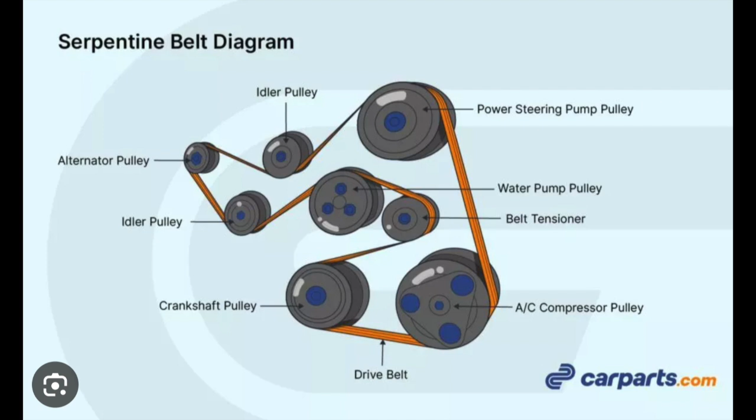I'm giving you this example to show how important the serpentine belt is for your car, because it basically keeps half of your car running—I mean, all of your car running. The alternator, power steering, water pump, AC, and crankshaft pulley—literally this drive belt keeps your whole car running. And most of the time I had no clue.

For all these years I've been driving, over 20 years now, all I did was put gas in the tank and drive until I saw the check engine light, and then I'd bring it to the mechanic to have them take care of things. But there's a lot we can do ourselves maintenance-wise to keep your car running well and prevent a lot of problems in the future, so your car will treat you right.

It pretty much won't break down if you keep up the maintenance on your car. So I started learning how to take care of my car in the last 3 to 4 years, and I'm really happy I can learn this stuff, though I wish I'd learned it earlier. I want to show you guys, especially the women, how to do the most basic stuff for your car that can keep it running for a long time without falling apart, because this stuff is very reasonable to take care of.

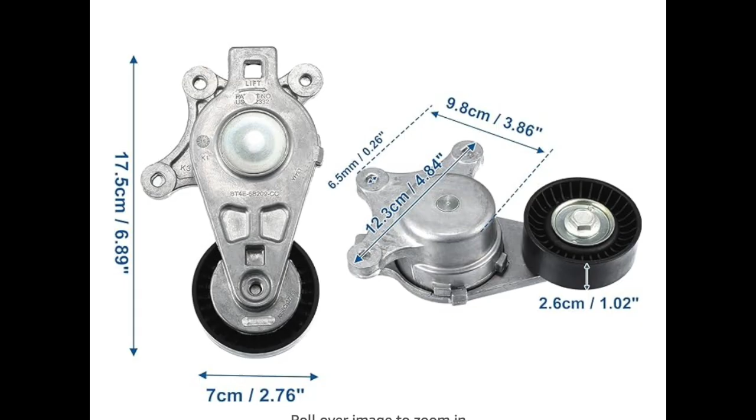If you don't want to do this job yourself, you can buy the parts and then just call around asking to see if there are any mechanics that are willing to put them in for you. They'll probably charge you much cheaper if you bought the parts yourself, instead of them charging you $500 for the job, when you could save hundreds of dollars doing it yourself. So you can check around and do it that way, or buy some of the parts yourself.

And roughly, I bought the tools too. It cost me about $130.

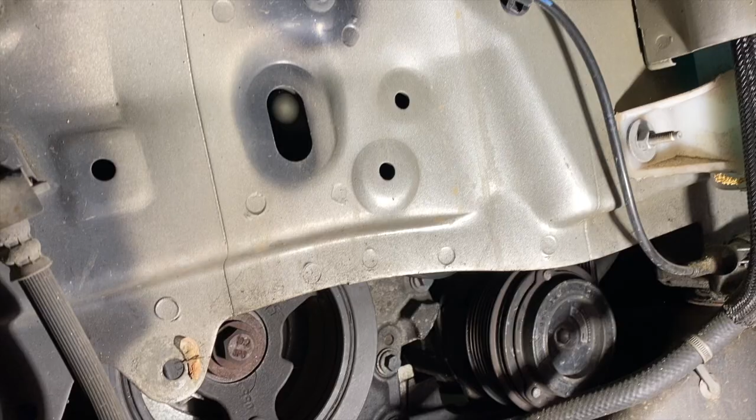Well, no, this one is the belt here - that's the belt for steering. The stretchy belt? The stretchy belt. Okay, and this is the timing... no wait, not timing, that's the serpentine belt, sorry about that. And the pulley's up there. The tensioner's a little bit off from here.

Hi guys, the next footage I'm going to show you is mostly just a drawing illustration, because I tried to take out the tire and the tire cover, but visually on the video you won't be able to see the looping and all that stuff going on. So I just want to show you a little bit better with the drawing instead of the actual footage, because for me, I just can't see it that well to give you a really good visual. So I hope you guys can follow the way I explain it.

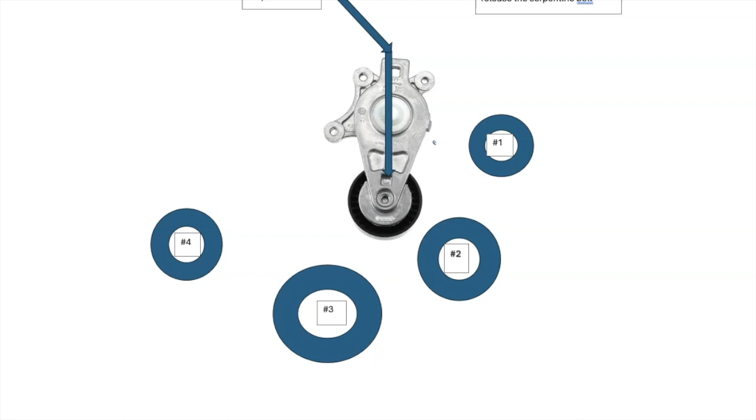So the tool I'm showing you earlier, you have to get the right tool to get this tensioner out, because turning the tensioner needs to be around 90 degrees, and with the incorrect tool, you can only turn about 45 degrees, and the tensioner stays on there super tight - you won't be able to get the belt out as easily. That's why with the right serpentine tool, you can set it up at this angle, then pull to about here, about 90 degrees or so - not quite 90, but it should help you get the serpentine belt out better.

So that's the first thing you need to do - have somebody at the bottom to help you insert this.

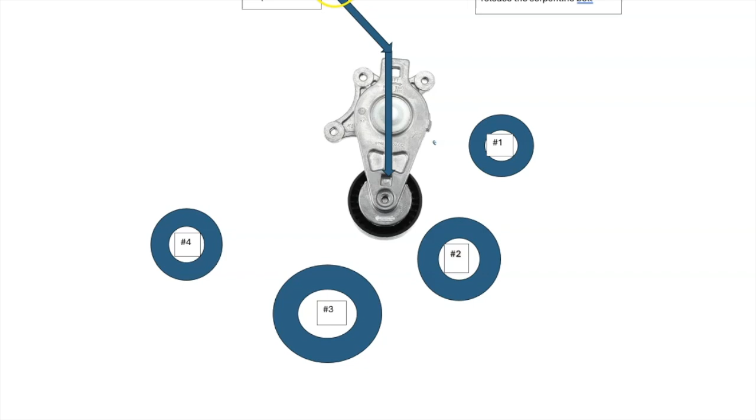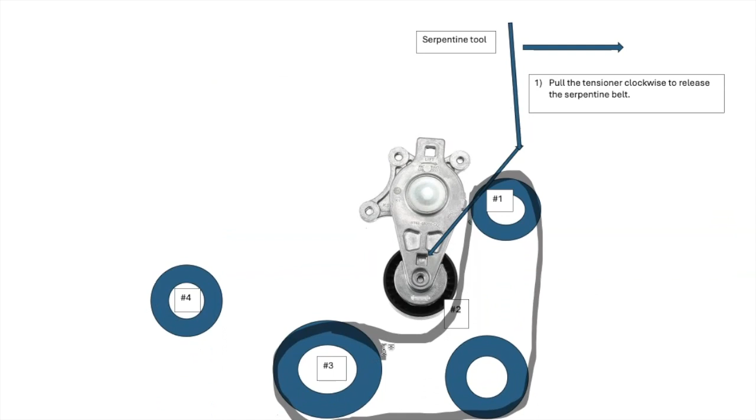Sometimes it's kind of loosened and hard to do it from the top, you won't be able to see this hole right here. So have somebody else guide you from the bottom while a person holds the tool on top, and you can get the perfect angle to get them in. Then the second part is you pull, and it will release the belt right here so you can pull the belt out easier.

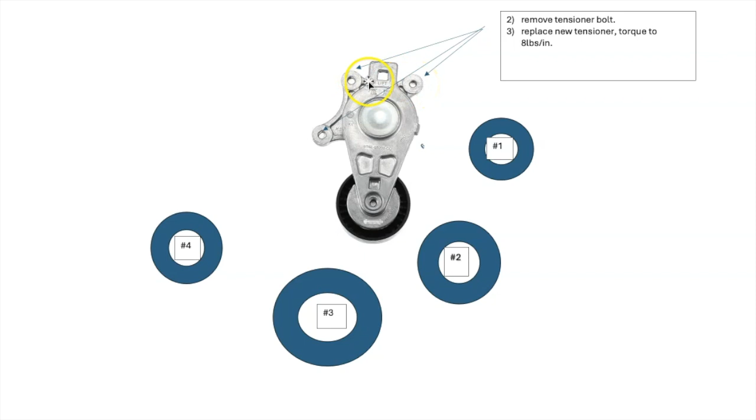The third part is you're going to remove the 3 bolts right here. This bolt is easier to remove from the bottom, and these 2 top bolts are easier to remove from the top.

Then replace a new tensioner back into its old place. Next, if you're going to replace this, you're probably not going to need to keep this belt, so you can cut it out.

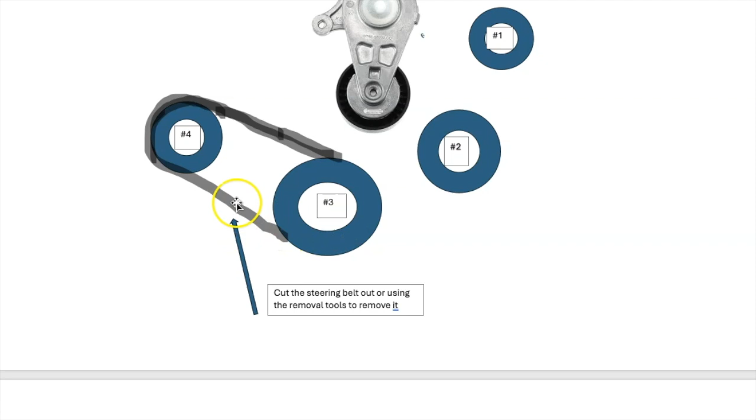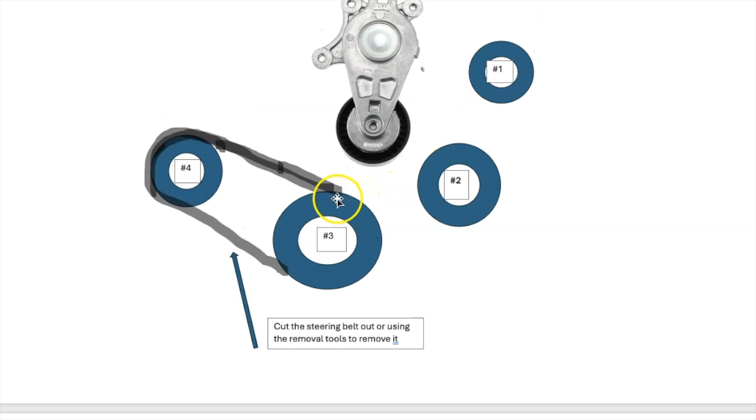Cut out the belt, and then you can remove the belt for the steering. This is a separate belt. On some of the pictures it does look like they have 1 belt, but it's actually 2 belts. This belt is separate from the serpentine belt.

Then this part is when you need to put the zip ties right around here, for the steering. Zip ties right there, and then you loop around this area. I had a friend turn the wrench clockwise like this, and the belt doesn't engage for a while, so it keeps spinning and we have a hard time trying to get this to loop around.

So I have to put my hands right in this area to pretty much guide it, guiding this belt all the way up here, and it basically turns by itself. Just be careful, do not get your hands caught up in between here or something, you're gonna get injured, so just be careful when guiding it through like that.

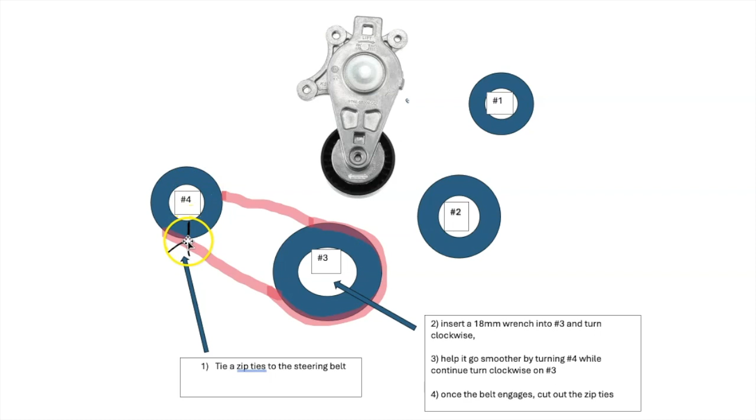Then we can get the belt together. And when the belt is in, when it reaches up here, you get scissors, or something sharp, and just cut off the zip ties right up here.

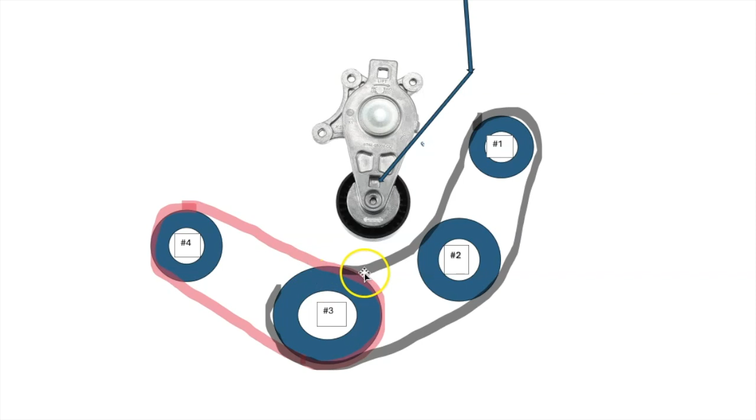Next you need to put this back, so now the steering belt is already in. You want to have a friend or someone helping you pull the serpentine belt tool for the tensioners, the same way as when you're taking it out. Have someone guide them in from the bottom to get the tool inserted correctly, then you start pulling to the right, the same way you guide them in, putting them in straight like this, but pulling towards this direction.

Clockwise, then you put the belt on there first and have them stay pulling the whole time you're doing this, so you don't get your hand pinched. Put the belt loop on like that, and the last one, when this tensioner is pulling out, you can put the belt over into wheel number 3.

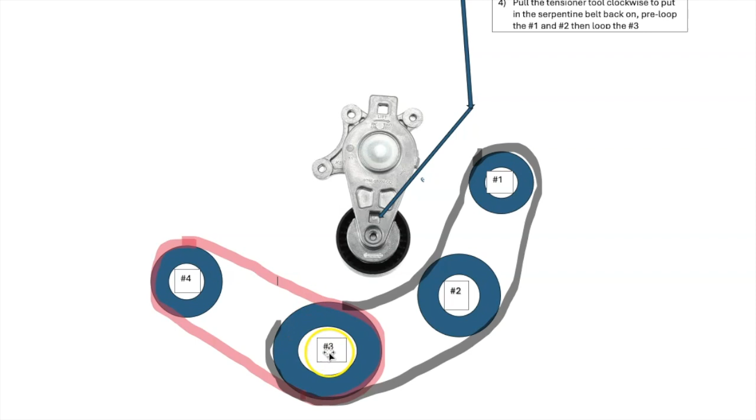So that is it, pretty much. That's how easy it is to do this job. I hope you are successful in doing it. I know it could be a challenge sometimes. Try to do this yourself, but it will be much easier to have someone helping you out. Congratulations, you are done.

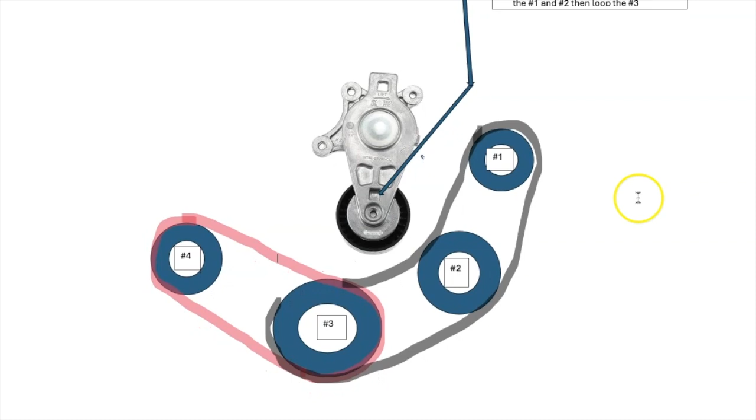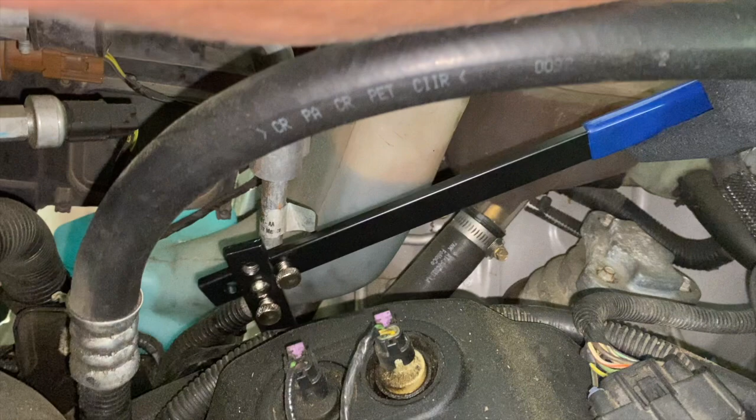That. Okay. No. Okay, one second. Right there. There we go. That's it. Can you push against it?

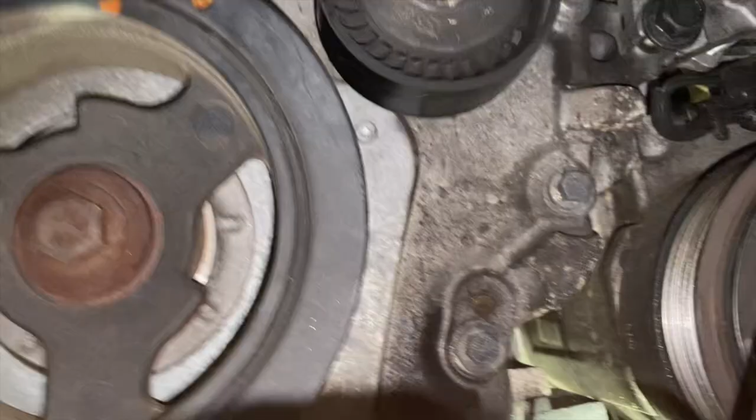Push against it, it's coming out. Yeah, okay, I'm pulling now. See that? Oh, awesome, see, I can pull. Oh yes, perfect. That beats the heck out of using a darn crowbar, doesn't it? I know, I bought the crowbar too. You bought the crowbar? You can take it back, huh? You said you have 2 crowbars. No worries.